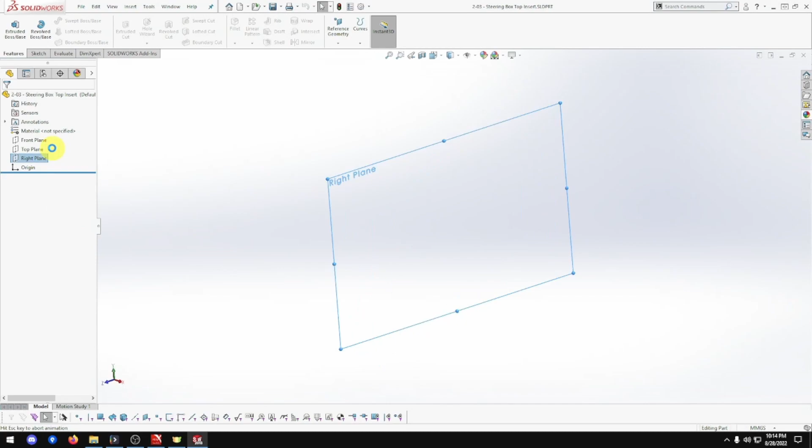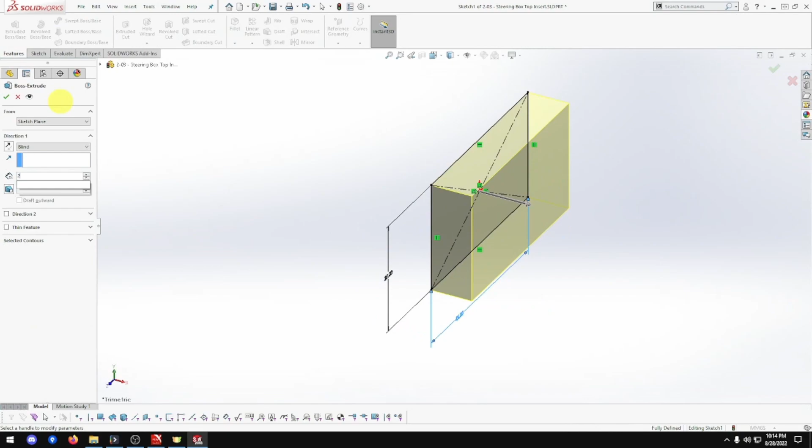So open up template MMGS. Let's do the right plane. We want a box, 27 high, 45 wide, and it's going to be 25 deep. So feature, 25, mid plane, and okay, there we go.

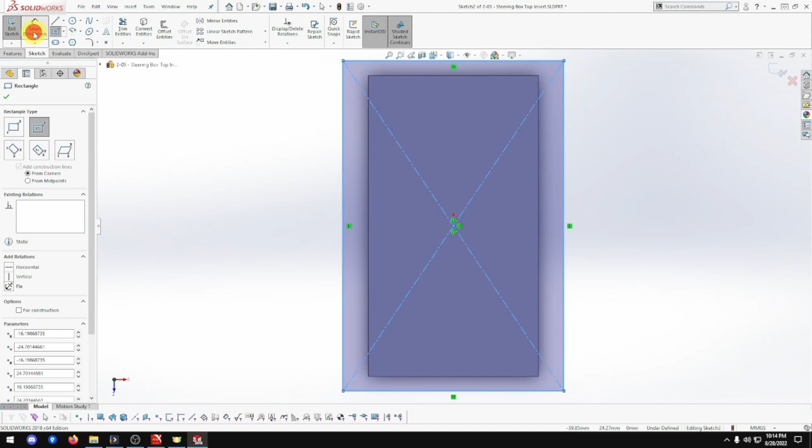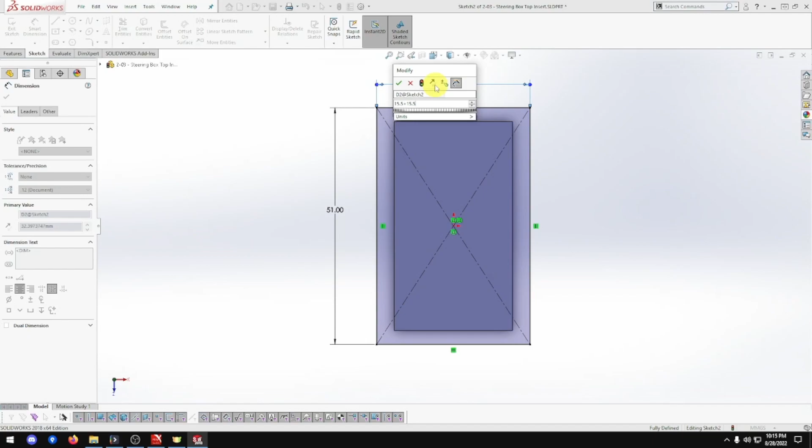Now on top of this one, we want to go to normal and create a sketch. We want to do another box on top, in the middle. That's going to be 25.5 plus 25.5, which should be 51. Beautiful. And that one there will be 15.5 plus 15.5, which is 31. Beautiful. That's all correct. Yes, it is.

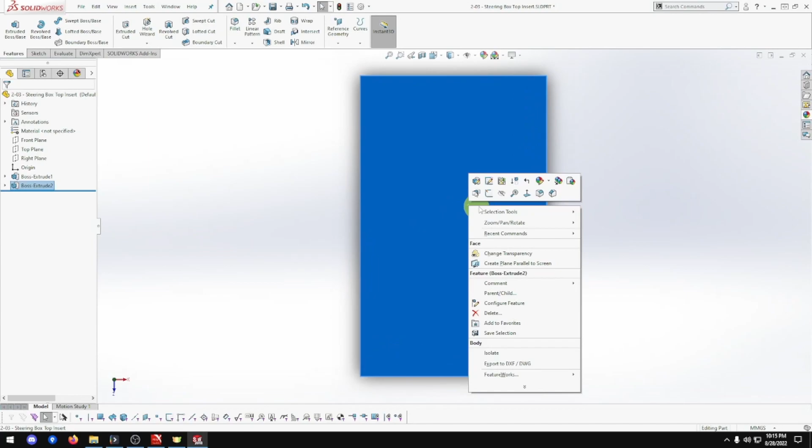Now on top again, let me just do a normal sketch. We want a circle this time. The circle is going to be circular, and that's going to be 19, and that's going to go all the way through. Feature cut extrude, through all, and done.

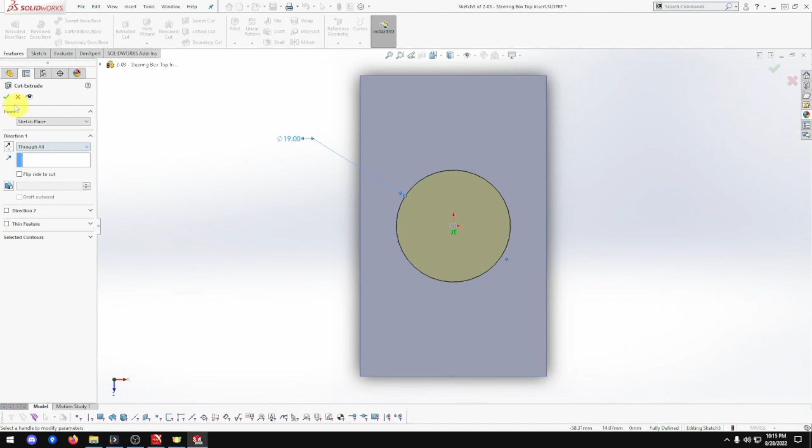Now, just before we go further, let me just do a fillet of one, probably going to be too much. And done. No, actually, it's quite nice. Okay, so that's that piece done.

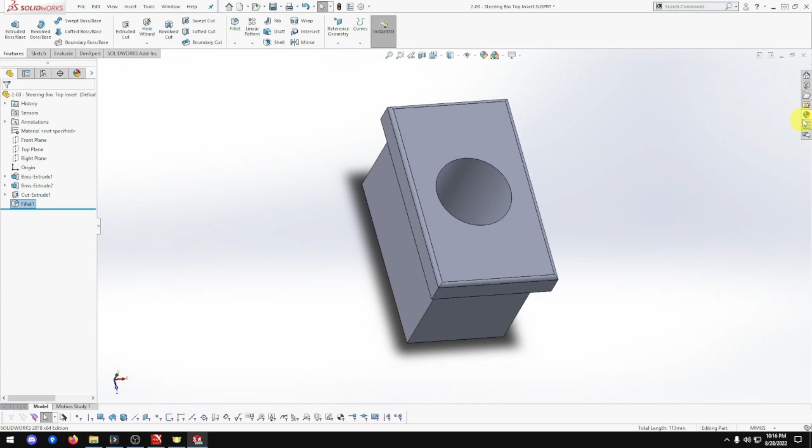Let's put a color to it. Still grey. That looks nice. There we go.

Okay, that is part 2-03, the steering box top insert, done.